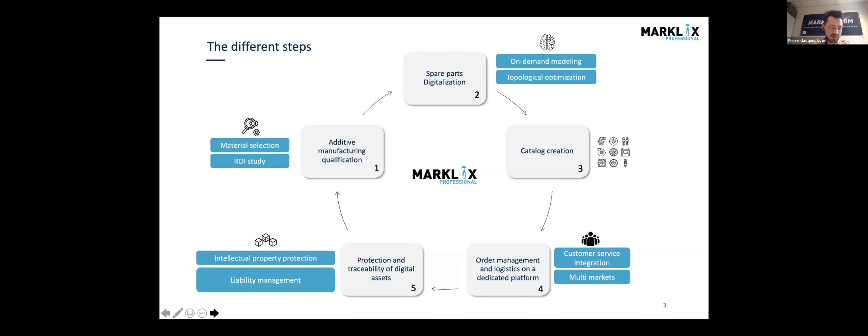So Marklix Professional allows identifying the percentage of printability of every spare part of a catalog, to guide in the choice of the right process and material couples, thanks to the machine learning we are building, to calculate the economic viability of the process, the return on investment, also to distribute the references on a dedicated white label platform, to manage a catalog of spare parts, to market and access a worldwide network of machines and certified service bureaus and service providers. And we can work on topological optimization and 3D modeling.

Thanks to the blockchain we are building, we can also create trust between different actors with distinct interests, to manage the intellectual property, the IP, in the decentralized production, to guarantee the quality of the manufactured spare parts, and finally to invoice remotely the prints and to automate many processes.

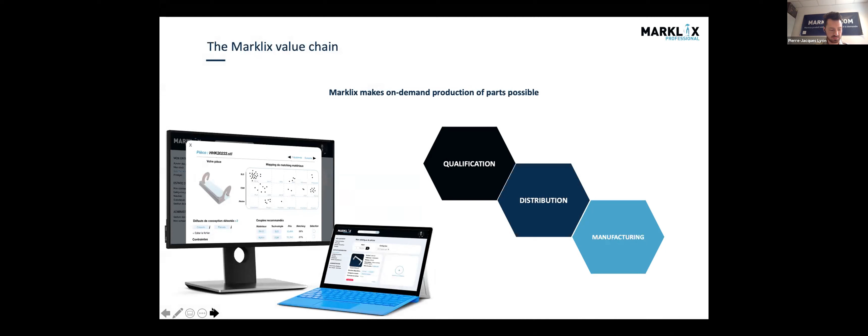So by facilitating qualification, distribution, and manufacturing, Marklix makes on-demand production possible. This paradigm shift allows bypassing many strategic issues, like reducing risk involving the warranties and liability, but also compliance to the new French and European directives we talked about, but also some benefits by boosting the profitability thanks to inventory and management cost savings, and by reducing waste, reinforcing brand reputation, and improving customer service performance.

And that's it for me. Thanks everyone. We can talk about it maybe later. I don't know if we have some questions now, or we'll take questions later, okay.

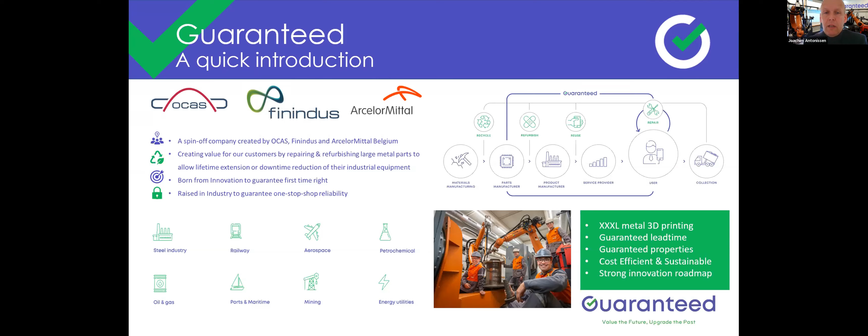This brings me to the different value propositions we offer as a company, ranging from what we call direct repair, where we basically do a one-on-one repair, over refurbishment, where we might also offer slight improvements with regards to design or material selection. As compared to casting or forging, where you require dies or molds, in additive we are completely freeform, meaning small changes to design or material selection can be done at no additional cost compared to conventional manufacturing.

As a lot of the industrial sectors we address are quite mature industries, especially in Europe, we also offer the possibility to produce new parts from scratch, which can be particularly interesting in case of obsolescence, as was already mentioned by Stuart in the introduction, where we can produce a part on a one-on-one basis, but we could also move to optimization, performing lightweighting, introducing channels for cooling or heating, or even combining different materials in one production to optimize functionality of the part.

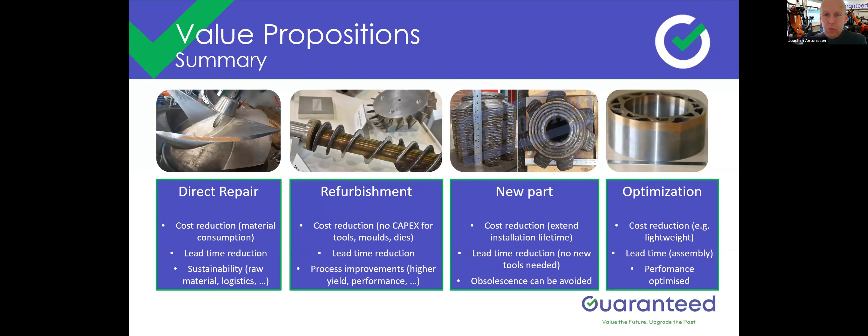Now, let me take you to two examples where we make this really concrete and tangible.

The first example is the repair of a cast wheel rim, used in large transport vehicles in the steel industry. These rims are a few orders of magnitude larger than the rims you would find on your Volkswagen Golf or Opel Astra. A normal person only reaches up to about half the height of this type of rim, so you can imagine their size.

The pictures illustrate the typical process we do in our company. First, we remove the damaged area—in this case it was a fatigue crack. We fill this area again using new raw material, using our wire and arc additive manufacturing process, and then do the final processing to bring the product back to its dimensional tolerances.

In this case, the economic savings for the end users were very huge, very substantial. You see here the new part cost 60,000 euros, while the repair cost only 5,000 euros. So it's a significant saving.

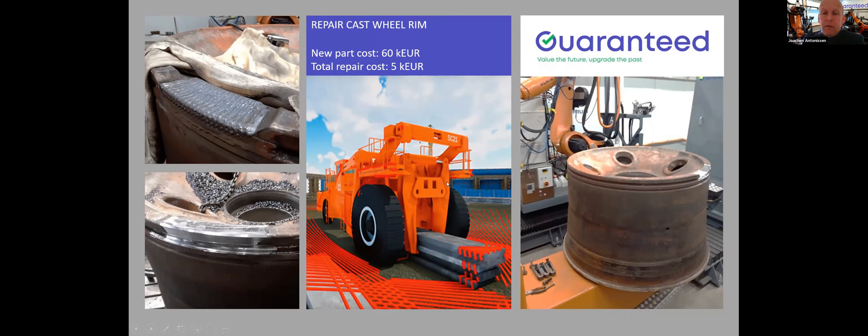But even more important, perhaps, these rims are only produced in the US. So when a part is required in Europe on the mainland, it actually needs to be shipped from the US to Europe, which represents a substantial carbon footprint due to that transport.

We analyzed, together with Cranfield University and Dr. Emanuele Pagone, the impact on energy consumption and carbon emission of producing these rims using conventional production capabilities versus repairing them using WAAM. You can see very clearly that even ignoring the benefits in terms of logistics and transport, the benefits in terms of energy consumption and carbon emission are really, really huge.

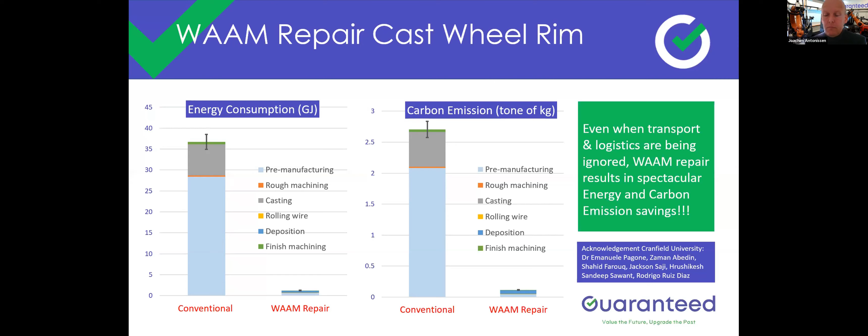Now, a second case we looked at was the production of a 2205 duplex stainless steel valve, also used in the oil and gas industry, where conventional production in this case is a combination of machining and forging.

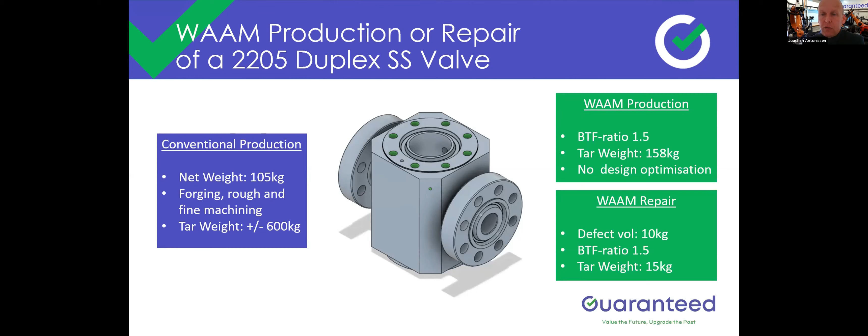The net weight of this valve was around 100 kilograms, which means you would need around 500 to 600 kilograms of raw material. Using WAAM production or WAAM repair, we can substantially reduce the amount of material needed due to the lower buy-to-fly ratio.

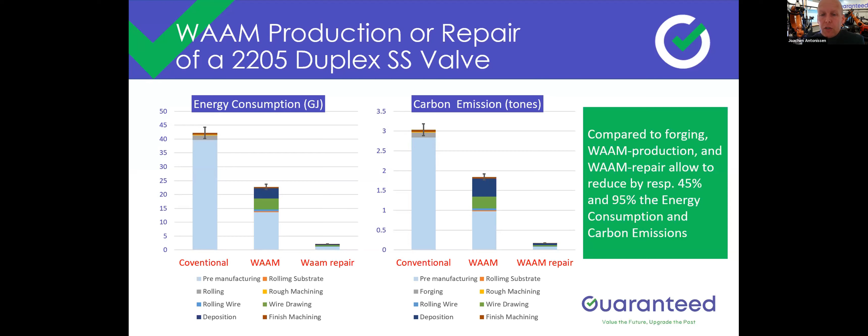Again, we looked at the impacts in terms of energy consumption and carbon emission for the option of producing the entire valve using WAAM or just repairing a certain section of it. The results speak for themselves—producing this type of component using our technology brings substantial benefits, and these benefits are even larger when we consider the repair option.

With that, I would like to come to the end of my presentation. If there are further questions, I'll be happy to take them later in the Q&A session, or you can reach me at the email address mentioned on the final slide.

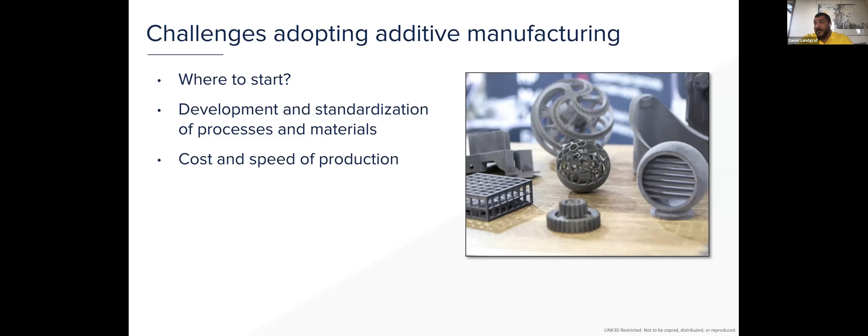And of course, a point is the cost and speed of production. If I have a large scale production where I need millions of parts, additive manufacturing is still tricky. Also, we have metal and polymer machine OEM manufacturers who are really working on that area.

So knowing these challenges, we also know that AM can bring large value, and especially for the right to repair, it can add a dramatic amount of additional value. The sustainability of the production itself, the possibility of sustainable production, is one of these topics. Creating digital inventories for spare parts, as we've already heard from Pierre Jacques today, is a value. Distributed manufacturing on demand leads to more cost efficiency and reduction of inventory, which brings again the point that sustainable production is a large value we can implement in this area.

So when I was asked what I think about this new right to repair rule, I definitely see the value for manufacturers who are starting to look at additive, implementing strategies about digital inventories and digital distributed supply chain management. That can be a large benefit for these manufacturers.

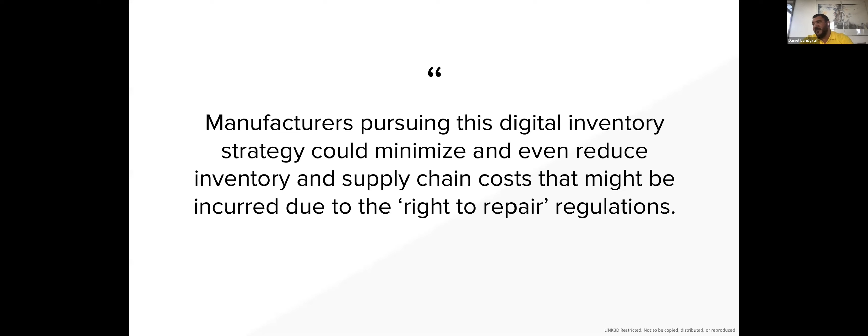Still, also in the right to repair, we will come up with challenges, despite all the positive facts additive manufacturing can bring to the industry. So the challenges are still there.

File availability and distribution. How do I make sure the file comes to the right place at the right time? IP secure transactions, we've heard that as well today. For each OEM, it's always a big topic - how do I make sure my IP stays with me?

Ensuring part quality leads a little bit into the certification and standardization process. How can I make sure that part quality is on a continuous basis the same? And one of the biggest questions might be, how do I provide parts to the audience? Do I provide them via a licensing model to repair centers, or do I give fair access for public use of these kinds of parts?

So at Link3D, we see this. We're tackling these challenges from a digital perspective, looking into enabling OEMs and organizations to have a full digital strategy implemented for the right to repair with additive manufacturing, starting with creating additive manufacturing supplier networks, where it's important, from our perspective, to have a single source of truth, a platform which manages both in-house and external production.

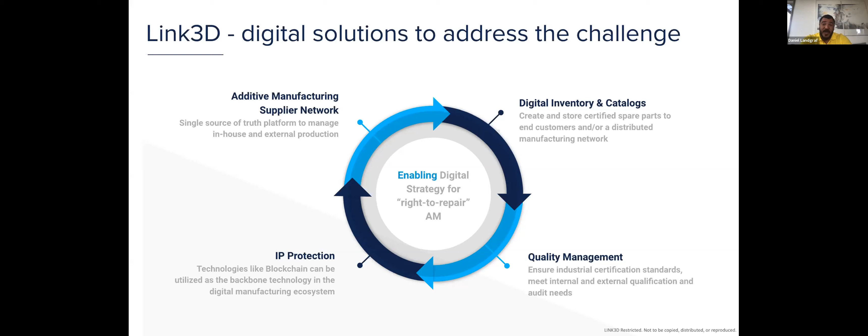So those are the topics we're addressing from a digital supply point of view. And if we manage as a conglomerate to do that, we're sure that the right to repair is a boost for the additive industry. Thank you very much.

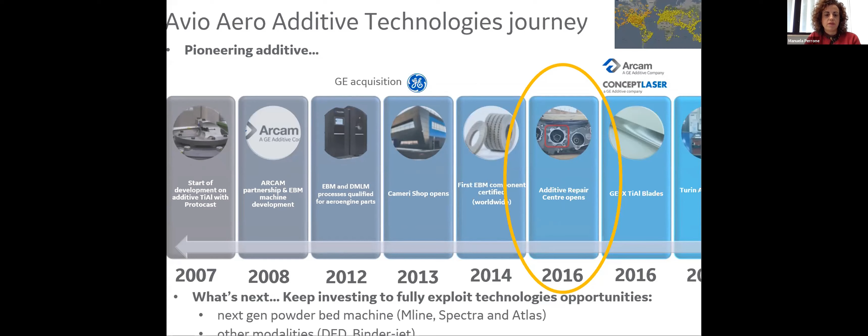It was boosted significantly when Avio Aero was bought by GE, since Avio Aero is now a company within the GE Aviation Group. One of the main steps related to this additive manufacturing journey is the opening in 2016 of the additive repair center, fully devoted to repair development for aviation components.

The mission of this lab is, first of all, to develop these additive technologies from a significantly low level of maturation of the technology itself to industrialization.

I used to say that our projects are always significantly and strongly business driven, since when we start a project from a low level of maturation of the technology, we already have on the other end a component and a specific condition on the component that we would like to repair.

How do we do this activity? In the research portion of this activity, we are strongly supported by a research network - the GE Research Network, in conjunction with other businesses like oil and gas, healthcare and so on. But also Avio is the chair of the new ETDC technical development community dedicated to repair, where we collaborate with several universities, in particular in Italy, but also in Europe.

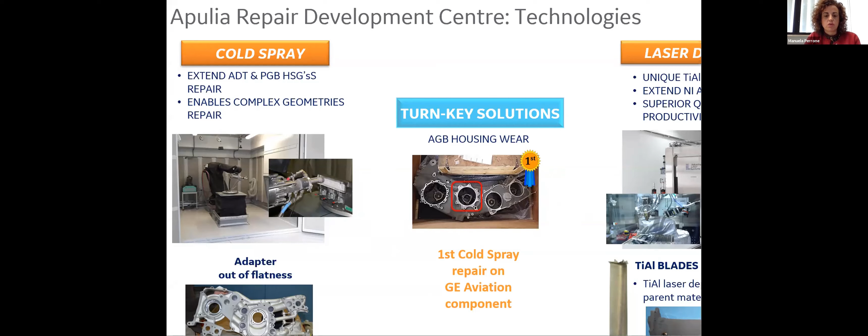One of the first achievements we got within the Repair Development Center is the industrialization, so development and industrialization of the first cold spray repair on a GE Aviation component.

If we look at the timeline, after the commissioning of the lab, we started on this project around mid of 2017, developing the technology on specimens and coupons. As soon as we completed the initial setup, we switched to the demonstration of the application of the repair procedure on a component itself. We completed this step at the end of 2017, and then we got to the activity of the handover to the Avio Aero shop.

This activity was really the first project, but we have here a typical timeline for our projects, where the setup on the component is made with strong collaboration with the component repair and overhaul shop, and this, in our opinion, facilitates significantly the handover to the shop and the industrialization. Industrialization is also significantly reduced in terms of timeline, risk of failure, and in increasing the use as much as possible of the technology already available in the shop, with the goal to fully industrialize the repair. This is something peculiar for the Repair Development Center.

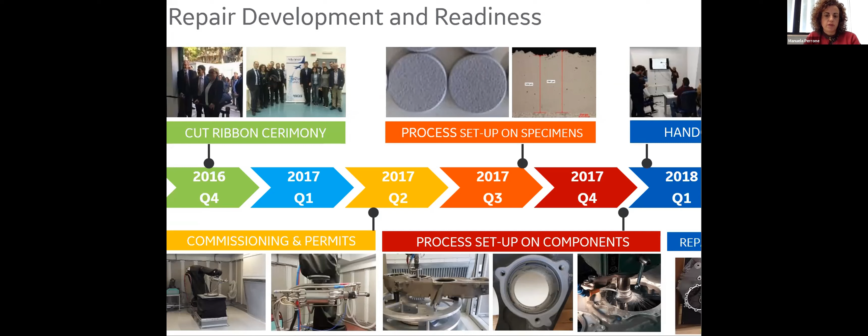We just can say that the additive manufacturing journey, particularly the repair additive journey, is one of the ways GE Aviation and Avio Aero fulfill their purpose by inventing the future of flight, lifting people up and bringing them home safely. So that's all for me. Thank you for your attention, and also from my side, I'm open for any question.

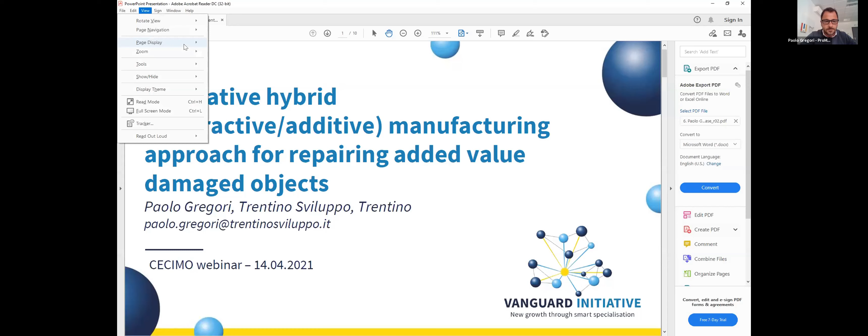So, thank you very much, and sorry again for the problem. My name is Paolo Gregori, and I'm the Managing Director of the Pro-M facility in Trentino region, Italy.

Please, you can go on. I'm here, and thank you for the invitation. I will present what we are working on about repairing damaged objects from industry through hybrid manufacturing.

We are in the Trentino region, a very small region in the north part of Italy. We have an autonomous province, and we have invested a lot in new technologies and innovation. In 2017, we started a new lab for prototyping mechatronics systems. So we are not only focused on additive manufacturing, but for us, additive manufacturing is one of the enabling technologies for realizing prototypes.

We invested quite a huge amount of money from regional development funds from Europe, at the moment about 7 million euro in machineries. We have about 2,000 square meters for our industrial lab and about 20 people staff.

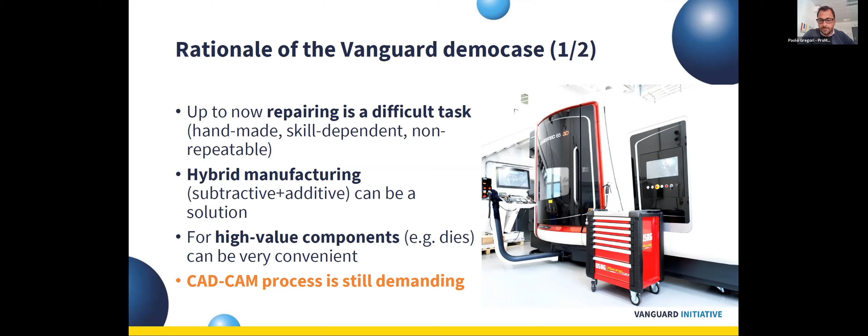So the main target applications at the moment are dies and molds for foundry, hot stamping, CFRP fabrication, and also wear-prone components for energy industry, in particular, for example, Pelton turbines.

Target technologies can be hybrid machines like ours, so they can combine 5-axis milling machine and direct deposition of metal together. But we can compare this approach with others like WAAM technology, a previous presentation has shown, and also LENS.

Our technology readiness level is quite high, from 6 to 8, so we are very near to market. At the moment, we are developing the technology in order to be very efficient and very effective in terms of demo case and specific activities for industry.

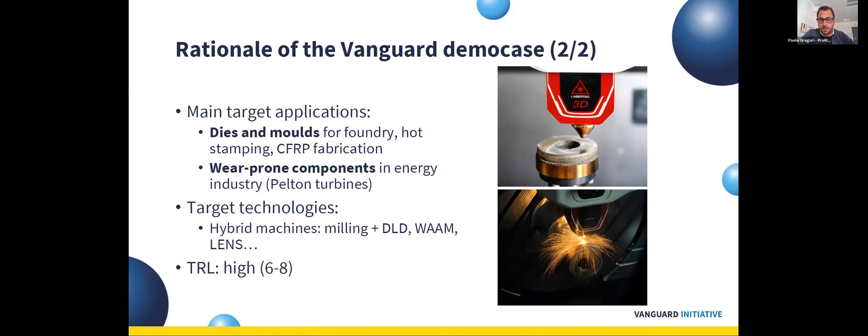The technical approach to repairing in our case is combining different technologies, starting with a 3D scan of the damaged object, a comparison between the CAD model using a specific approach called octree. If someone is interested in details, I can go deeper in the technical approach, but it's not the case at the moment because I have no time by now.

So I will go on and I say that we have to add the new material where it's missing and restore at the end the original shape by a milling machine.

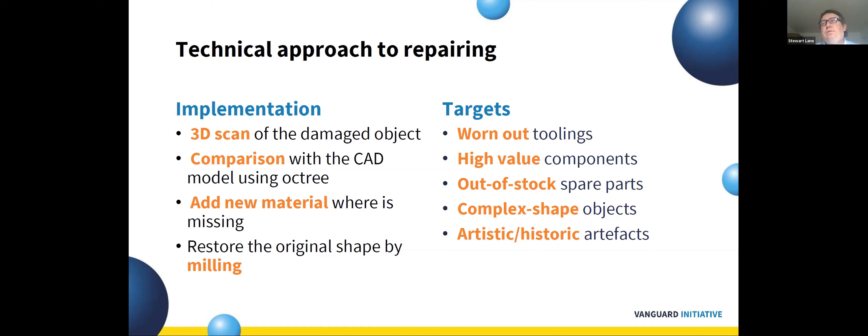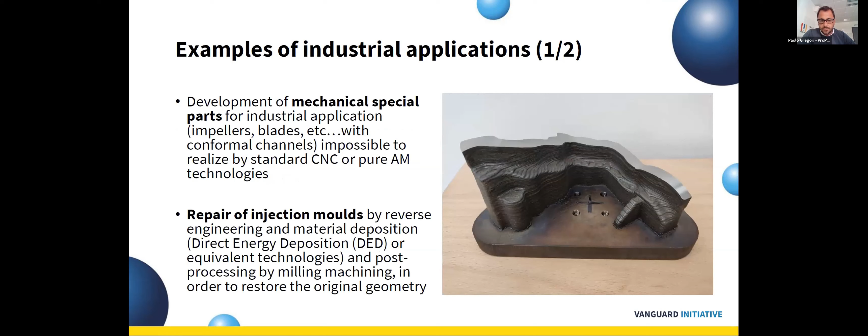And I would like to conclude with this minute with some industrial applications. So development of mechanical special parts, repair of injection molds by reverse engineering and direct energy deposition or equivalent technologies, please.

And as you can see, we are the starting point of this technology and development, an approach where we can repair damaged objects, and also we can put multi-material objects on that, like copper on stainless steel, or a mix of different powders and different materials.

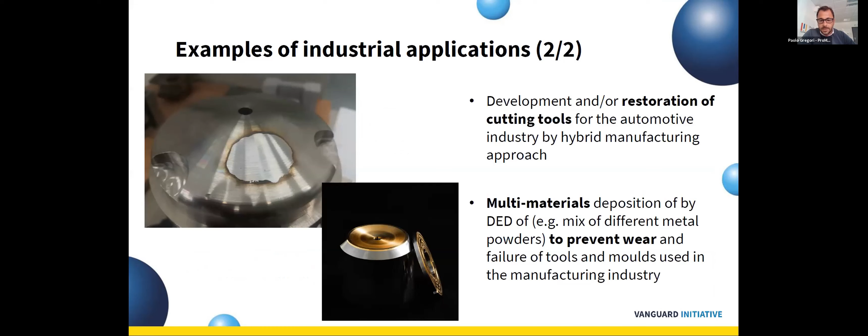So I can conclude with my last slide, please. And I can say that we are starting up a new demo case in the Vanguard Initiative. We are running research and development activities in order to extend the material portfolio that we can use.

We are enhancing a network of competencies within the pilot, and we are approaching industrial applications that are quite interesting at the moment for industry. We are looking also for further use cases, and so we are very welcome if someone of you is interested to go deep into details of this approach. Thank you very much for your attention.